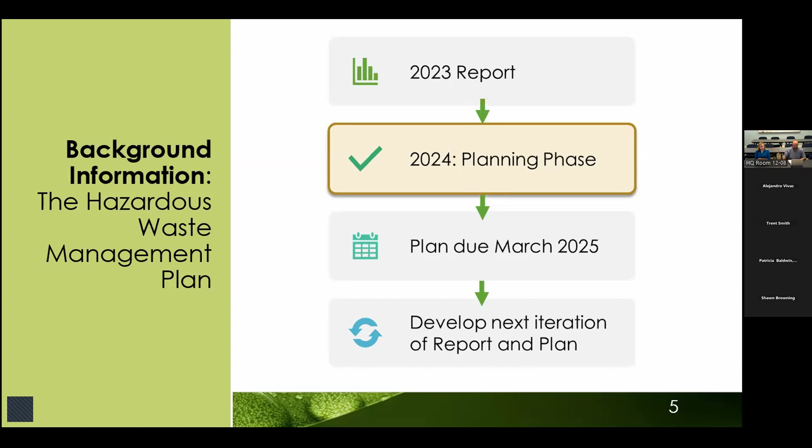This is an iterative process, and we're currently using the information in the report and the feedback that we've received over the last couple of years to develop a hazardous waste management plan. Now, the plan itself will include specific goals and recommendations that relate to the information that we're discussing throughout these 10 workshops. Next slide, please.

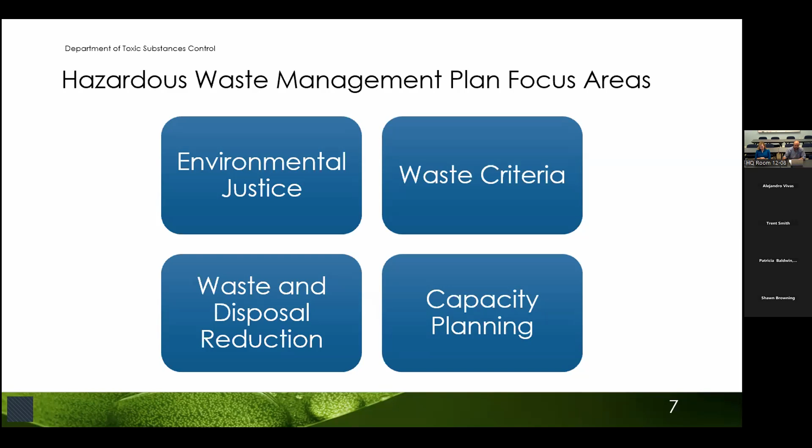Hazardous waste management planning offers an opportunity to recenter and redevelop a focus on hazardous waste generation and reduction. This begins by quantifying and understanding the industries and numerous processes that generate hazardous waste. This will also allow us to better identify opportunities for waste reduction, so alternative hazardous waste treatment technologies can be best applied. In addition, it will allow us to determine if there are regulatory barriers to waste reduction.

In 1984, Congress created the Land Disposal Restriction Program, which prohibits the land disposal of untreated hazardous waste and requires EPA to specify either concentration levels or methods of treatment for hazardous constituents. The LDR program ensures that wastes are properly treated prior to disposal. This makes hazardous waste less harmful to groundwater by reducing the potential for leaching of hazardous constituents and by reducing waste toxicity through destroying or removing harmful constituents.

One of the three main keys to the LDR program is called the disposal prohibition. This prohibition really is the basic premise of the LDR requirements, and it requires waste-specific treatment standards to be met before a waste can be disposed to land.

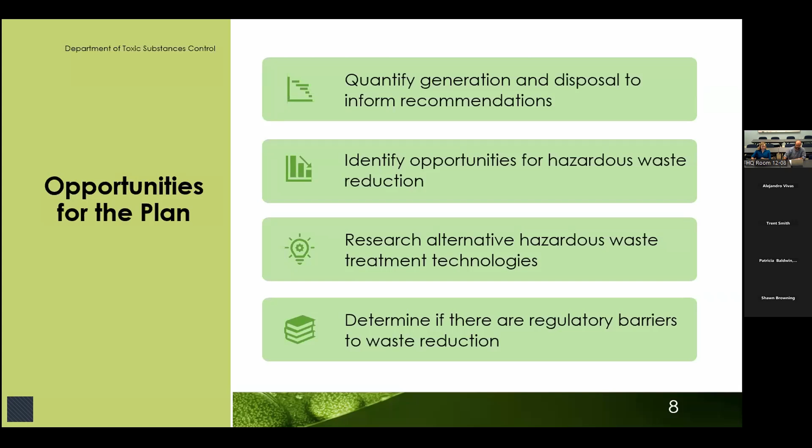Hi, my name is Kayla Kuhl. I'm a hazardous substances engineer with the Hazardous Waste Management Plan unit. As Ryan said, I'll be presenting today on a specific waste stream, which is hazardous waste that requires incineration as its treatment method. I'll be providing a broad overview of incinerable waste from cradle to grave.

Incinerable waste is a waste stream that gets a lot of attention, and we think that it's worth further analysis. The Hazardous Waste Management team has recommended that this be a waste stream that is studied for reduction. In this workshop, we are going to be discussing the generation of incinerable waste and how incinerators work. We will also be exploring incinerable waste source reduction and potential alternative management for waste requiring incineration. As always, we want to hear from you, so we will be ending this workshop with a public feedback session.

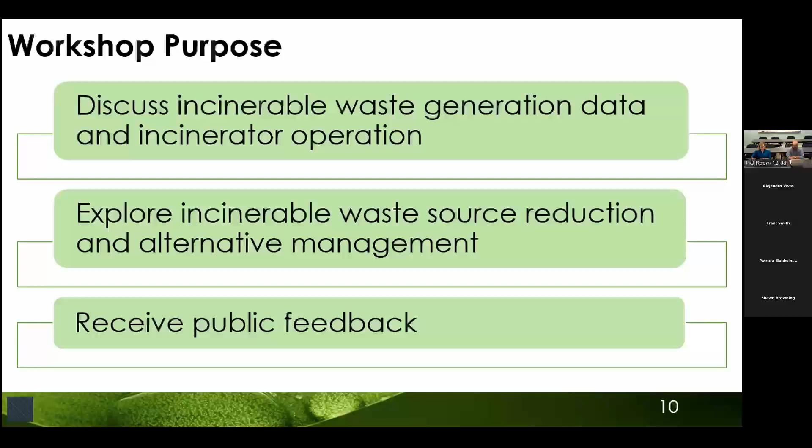We'll move into a discussion of what incinerators are, how they work, and the regulations they operate under. Then, I'll be discussing the potential for alternative technologies to use instead of incineration, and both the limits of these technologies and the potential regulatory concerns. Finally, I'll be discussing ideas for reduction efforts of incinerable waste.

So let's start off with the requirements for the Hazardous Waste Management Plan and why we are analyzing waste requiring incineration specifically.

SB 158 is the statute that determines the contents of the Hazardous Waste Management Plan, and it requires that the plan make recommendations on how to reduce the amount of hazardous waste generated or disposed of. This includes goals on particular waste streams or hazardous waste types.

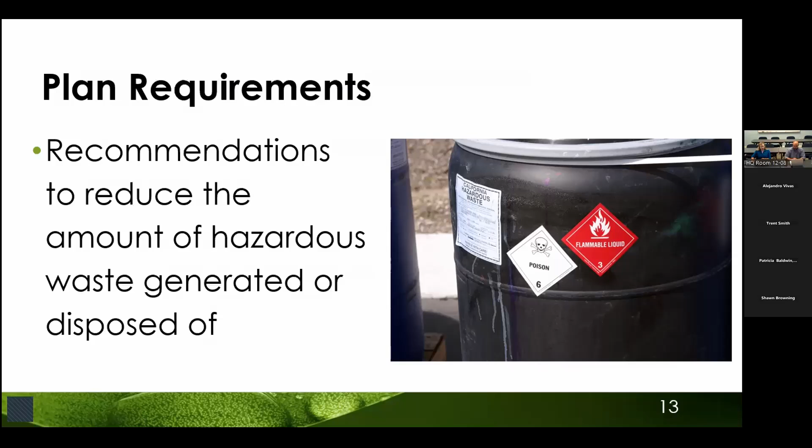For this iteration of the plan, we have recommended that hazardous waste requiring incineration as its treatment method be targeted for reduction. Waste requiring incineration is generated by a variety of industries, and even some household hazardous waste is managed by incineration. I will be going into generation data more in a bit, but first let's look more into why we have prioritized incinerable waste for reduction.

Incinerable waste only makes up about 3% by weight of hazardous waste manifested in California. So it's not that large of a waste stream compared to others, but incinerable waste may be a good target for reduction for several reasons.

Even though 81% of California's hazardous waste overall is non-RCRA and therefore only hazardous in California, those numbers are basically flipped for incinerable waste, where 78% of incinerable waste is RCRA and therefore hazardous federally. So even if that waste goes to other states, it must still be treated in a hazardous waste incinerator.

As Ryan mentioned, there are no commercial hazardous waste incinerators in California, and it is unlikely that any will be proposed. There are limited incinerators nationwide. The 2020 global pandemic also triggered a series of events that disrupted the hazardous waste management system nationally. In 2021, the US EPA sent a memo that they became aware of a backlog at the hazardous waste incinerators, and some facilities would no longer accept hazardous waste designated for incineration. This backlog created a national issue with managing these hazardous waste streams.

Our team has been communicating with the US EPA to monitor the situation, and even though there are signs that this backlog is improving, it has yet to fully resolve. So reduction in incinerable waste is more important than other types of waste from the perspective that there is very limited management capacity. Another reason we're looking at incinerable waste specifically is because these wastes may have potential for negative community impacts.

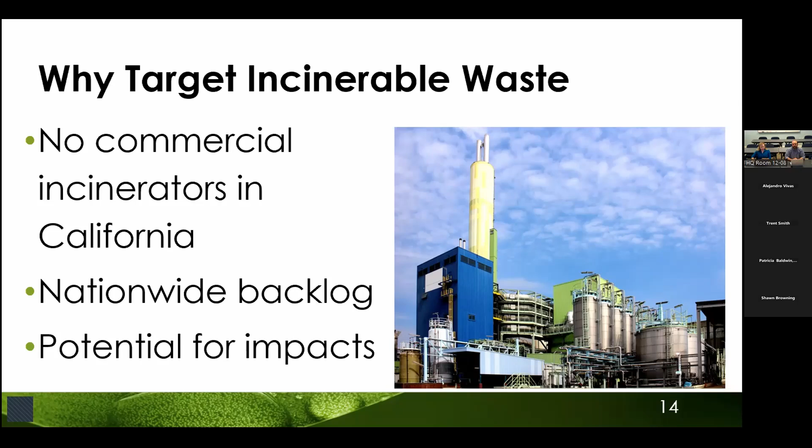Now, I want to note here that there's two different terms. There's the term combustor and there's incinerator. And those sometimes are used interchangeably, but they have different technical definitions. Incinerators are used to burn hazardous waste primarily for waste destruction and treatment purposes, though some energy or material recovery can still occur. The term combustor is broader and includes not only incinerators, but also facilities where waste is destroyed, but substantial energy recovery occurs as well. The facilities that are primarily for energy recovery are called boilers and industrial furnaces, or BIFs.

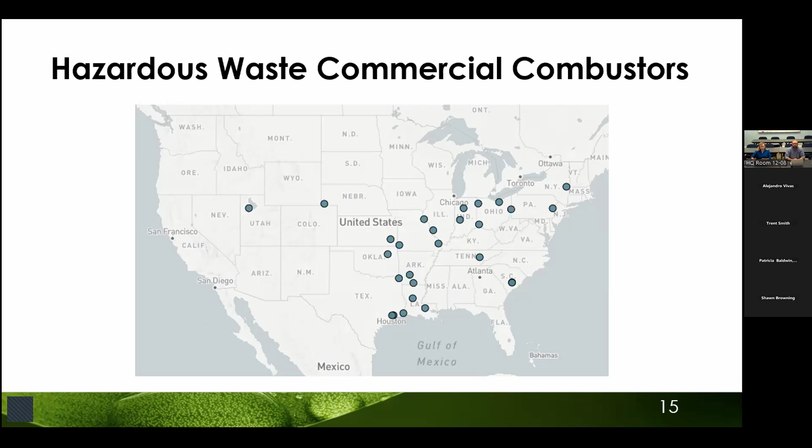As you can see, there are very few facilities in the entire western half of the United States and none in California. There's more in the eastern half of the country, but they're still pretty limited, which is why there's a capacity shortfall for incinerating hazardous waste.

Imbalances in the hazardous waste management system can have impacts to Californians and their communities. First, it can lead to illegal disposal. This photo shows 2,600 gallons of illegally abandoned hand sanitizer dumped in the Lucerne Valley in September of 2023. During the pandemic, there was a large ramp up of production of hand sanitizer to help protect people from the coronavirus.

But as their expiration dates passed, that hand sanitizer became an ignitable hazardous waste. As we discussed on our last slide, there is limited incineration capacity, and this lack of capacity in part could have contributed to this type of illegal mismanagement. I don't want to imply that an excess supply of capacity will stop all illegal mismanagement issues. Hazardous waste is expensive to dispose of, so some people will always break the law even if there is excess capacity.

That being said, the lack of capacity can contribute to these types of issues. Also, if other states had no hazardous waste incinerators like California does, then there wouldn't be any legal way to dispose of hazardous waste requiring incineration. And while there will always be potential impacts from the generation and proper management of hazardous waste, the impacts of illegal disposal will be worse.

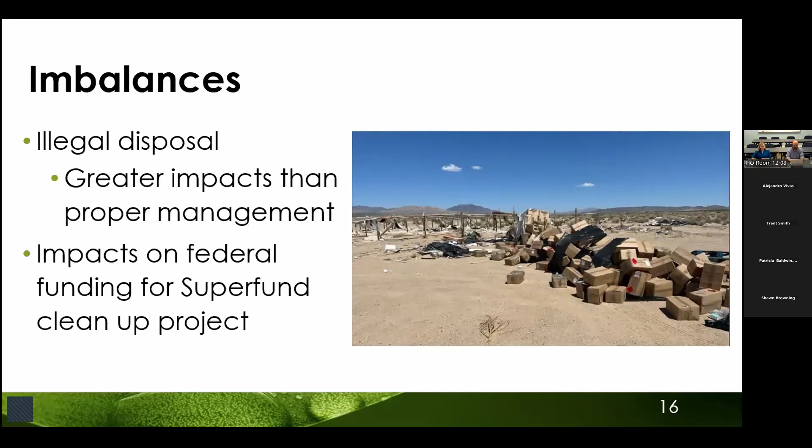In summary, waste requiring incineration as a treatment method has been targeted for reduction because there are no incinerators in California and very few nationwide. So there is a national capacity shortfall. If California does not address our capacity shortfall, then there is a potential for new CERCLA funding to be endangered. We also need to do further research into the potential impacts that waste requiring incineration has. We do know that if there isn't adequate capacity for legal hazardous waste management, then there will be negative impacts from the illegal disposal of that waste.

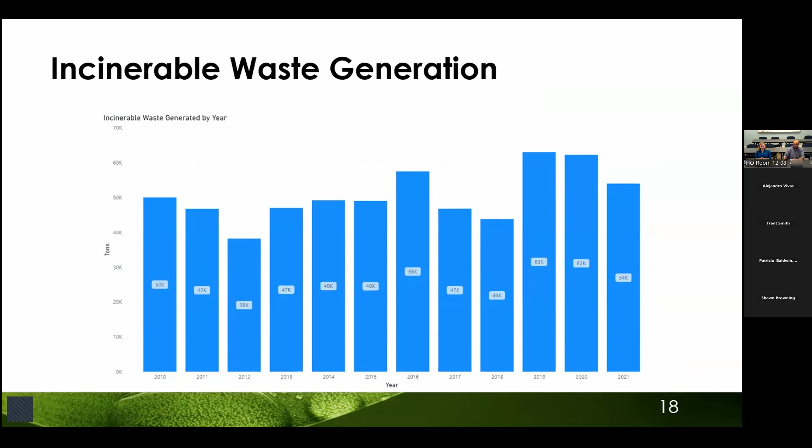Let's start off with an overall generation trend. This graph shows the incinerable waste generated between 2010 and 2021. As you can see, there doesn't seem to be any clearly increasing or decreasing generation. The generation looks a little higher than 10 years ago, but not enough to clearly see an increasing trend. And there's a decent amount of fluctuation from year to year.

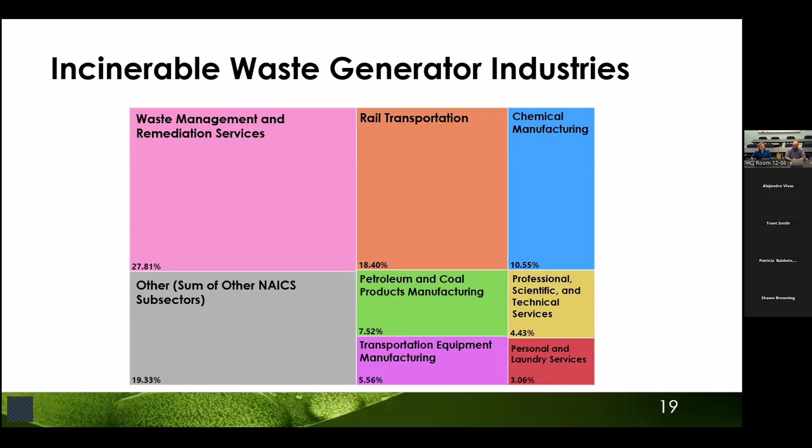To further understand incinerable waste generation, we looked at the top 5 RCRA wastes requiring incineration in 2021. As a reminder, RCRA is waste identified as hazardous federally, not hazardous waste only in California. It's probably not surprising that the top code is D001 for ignitable hazardous waste, since burning the waste in an incinerator will remove the characteristic that made it hazardous. This is a broad category of many wastes.

Looking at the NAICS codes generating D001 waste, it seems to match the overall trend for incinerable waste, with the top categories being waste management, transportation, and chemical manufacturing. One interesting thing is that the 4th largest industry generating D001 waste is hospitals and related services, which does not show up as one of the top NAICS codes overall. This may be like sanitizer being incinerated, but this may require future research.

The other top waste streams are D007 for chromium waste, F003 for non-halogenated solvent waste - non-halogenated solvents include things like methanol, acetone, also blends of solvents that are non-halogenated. The 4th category is D035 for methyl ethyl ketone waste, and the 5th is D005 for barium waste.

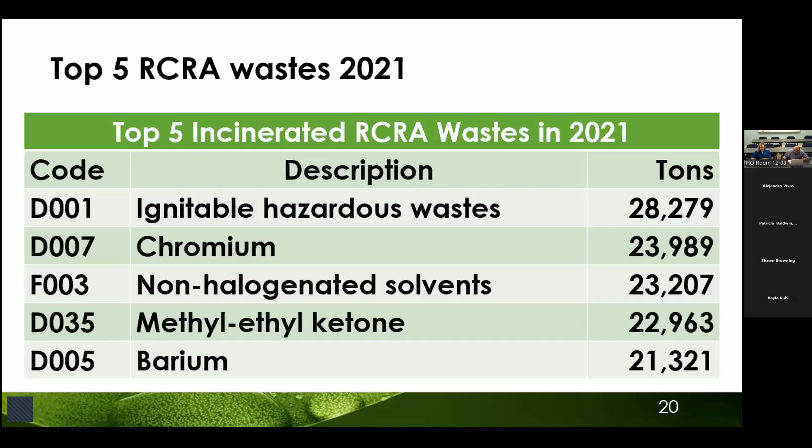We know in general what industries are generating these wastes, but more research is needed to determine which industries are generating specific categories within these waste codes. D001 especially requires more research because it's the top waste stream, but also because there is a wide variety of wastes that fall into that code.

Most hazardous waste being incinerated is required by RCRA, but we also polled the top 5 non-RCRA incinerable waste for 2021 to better understand why some wastes are only hazardous in California, but still managed by incineration as treatment. The top waste stream is 612 for household waste. This is extremely ambiguous from the name, but it can include things like aerosols, gasoline, and paint. The second highest waste stream is 343 for unspecified organic liquid mixture, which is also pretty vague, but can include paint as well. The third highest is 331 for off-spec, aged, or surplus organics.

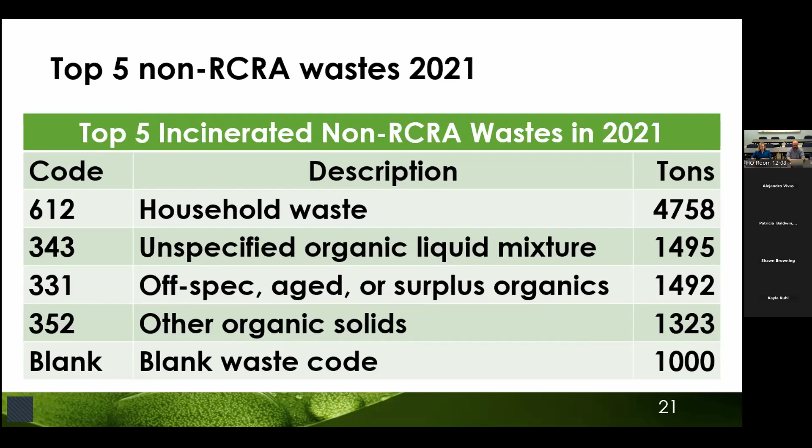That tells you why it's a hazardous waste, but it doesn't tell you what the chemicals are under that umbrella of being off-spec or past expiration date. The 4th largest waste stream is 352 for other organic solids, which is also extremely vague and non-descriptive, but can include spent refinery carbon, painted materials, and solvent-contaminated debris like spill cleanup wipes. The 5th largest non-RCRA waste stream had a blank for the waste code, representing errors in our manifest system.

Let's look at where incinerable wastes are going. As you can see, the pattern of out-of-state destinations mostly follows where the incinerators are located. In general, the larger the dot, the more tonnage of incinerable waste received, though it's not perfectly proportional. There are some smaller dots in areas that do not have hazardous waste incinerators, including in-state. These may include transfer facilities where waste is being combined, but we need to research that further.

The numbers on this graph are the tons of incinerable waste sent to each facility. They are rounded to the nearest ton. So dots that have a 0 next to them received a little bit of incinerable waste, but it was less than half a ton, so it rounded down to 0 when rounded to the nearest ton.

Not particularly surprising, the closest hazardous waste incinerator to us in Utah received the most incinerable waste in 2021 at 24,000 tons. The next closest facility to us in Colorado received the second highest amount at 12,000 tons. Several other incinerators in the eastern half of the country also received large amounts of California-generated incinerable waste.

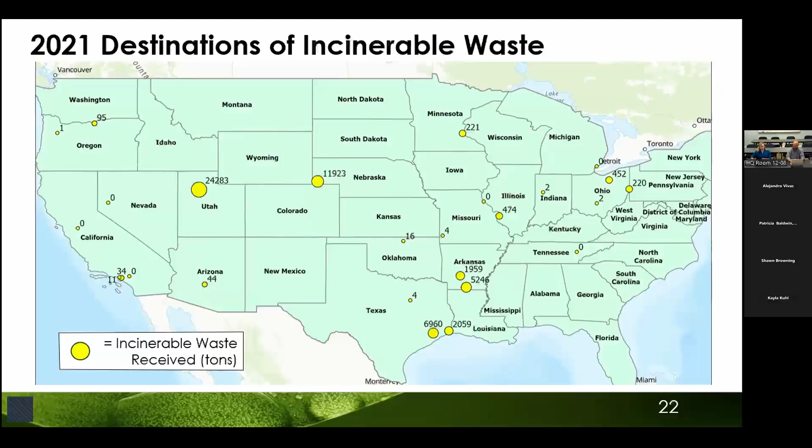We calculated the distance from generators to destination facilities. The 2023 Hazardous Waste Management Report included a calculation of the average distance between generators of manifested hazardous waste and the destination facilities receiving that waste. The distance was calculated using information from Hazardous Waste Manifests between 2010 and 2022 between each generator and destination facility, which accounts for the curvature of the earth, but not any actual physical roads taken. So this is an average direct distance, but could be called an as-the-crow-flies distance. The average direct distance between generators and destination facilities for all Californian manifested hazardous waste was calculated to be about 500 miles.

As mentioned, this is not the actual routes taken, just the physical distance between the two points and the curvature of the earth. The actual distance traveled will always be larger than the calculated ideal distance, though exactly how much larger may vary.

The calculation was repeated for waste requiring incineration specifically, and the average distance between generators and destination facilities was found to be 1,000 miles, twice the overall average distance hazardous waste traveled. This isn't surprising because for other waste types, California can handle a lot of its hazardous waste in state, which brings the average down.

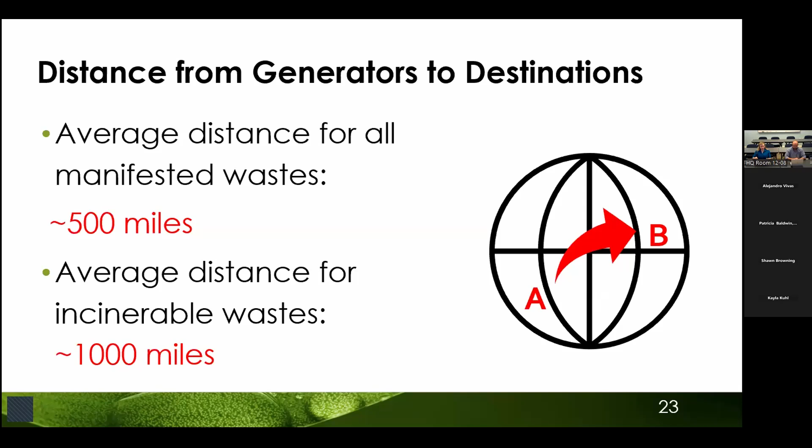I want to note that a lot of these longer distances for hazardous waste transportation take place on trains, or at least partially on train. You may have a truck bring waste from a generator to the nearest train. However, it's still worth noting the longer distance traveled, even on a train, still means more greenhouse gases being emitted for transportation of that hazardous waste.

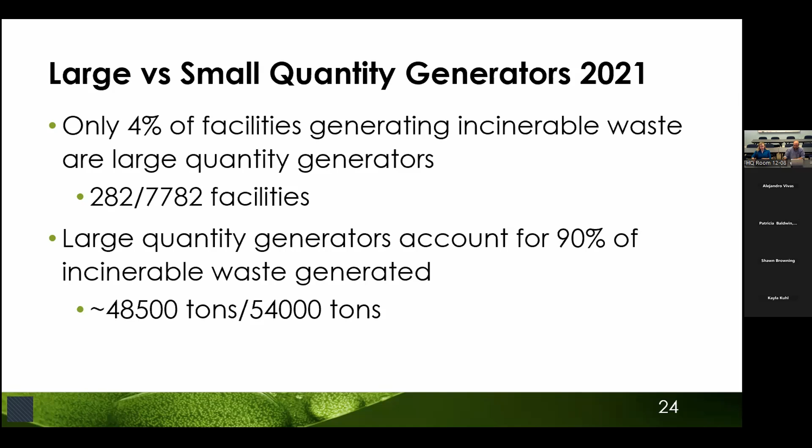However, DTSC does not have authority over local zoning decisions with regards to the locations of businesses. Next slide, please.

Let's look at the locations of these large quantity generators. In SB 535 designation, Cal EPA formally designated 4 categories of geographic areas as disadvantaged.

First, census tracts receiving the highest 25% of overall scores in Cal EnviroScreen. Second, census tracts lacking overall scores in Cal EnviroScreen due to data gaps, but receiving the highest 5% of Cal EnviroScreen cumulative pollution burden scores. Third, census tracts identified in the 2017 designation as disadvantaged regardless of their scores in Cal EnviroScreen. And fourth, lands under the control of federally recognized tribes.

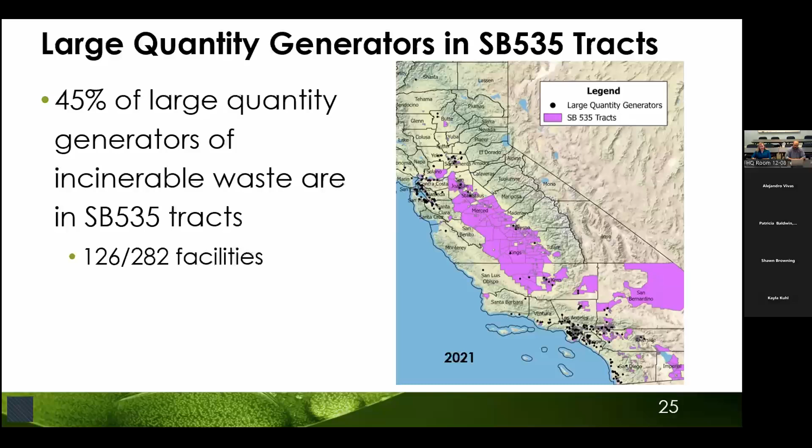We do see these facilities in our system, but we don't see them sending their waste to an incinerator because we see them as sending it to the transfer facility, not the final incinerator. There may also be transfer facilities shown on this map that do not generate the hazardous waste themselves, but are considered large quantity generators in this analysis because of the amount of hazardous waste they accept. Next slide, please.

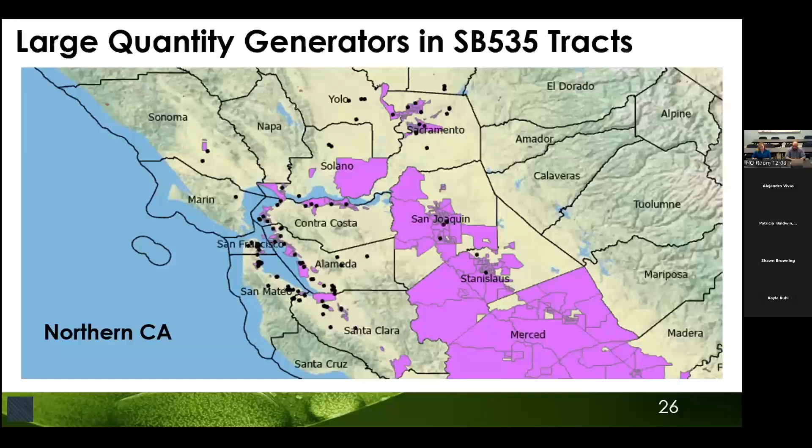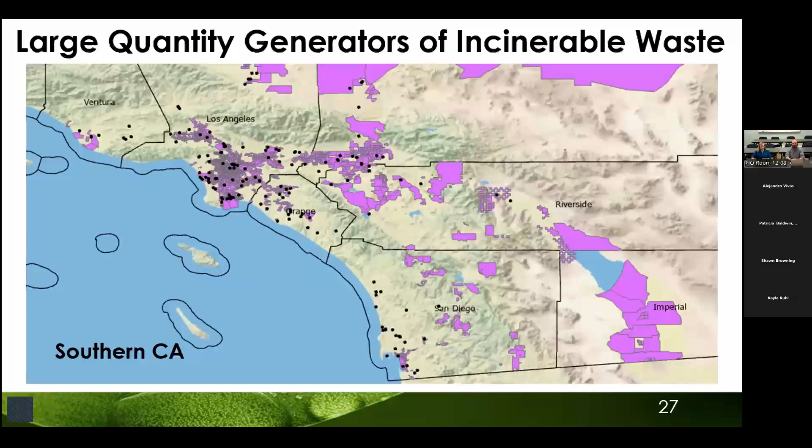Here's a zoom in of that same map in Southern California. Now you can see on this map very clearly there's a pretty substantial cluster of large quantity generators located in SB 535 communities near Los Angeles. Next slide, please.

We've discussed the cradle of incinerable waste in terms of generation. Now let's look at the grave for this waste, which is the incinerators themselves.

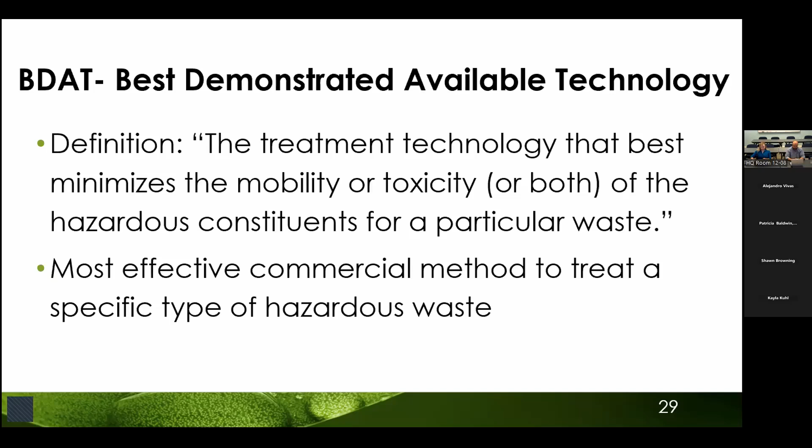The BDAT has to either decrease the mobility or the toxicity of a hazardous waste, ideally both. Incineration reduces toxicity by destroying toxic organic constituents. Mobility is also decreased. You can incinerate a liquid waste such as a solvent and produce a solid ash. Liquids can't be disposed of in landfills because they're mobile and difficult to contain even with liners, but ash is less mobile, so it's easier to contain. Incineration also substantially reduces the volumes of these wastes.

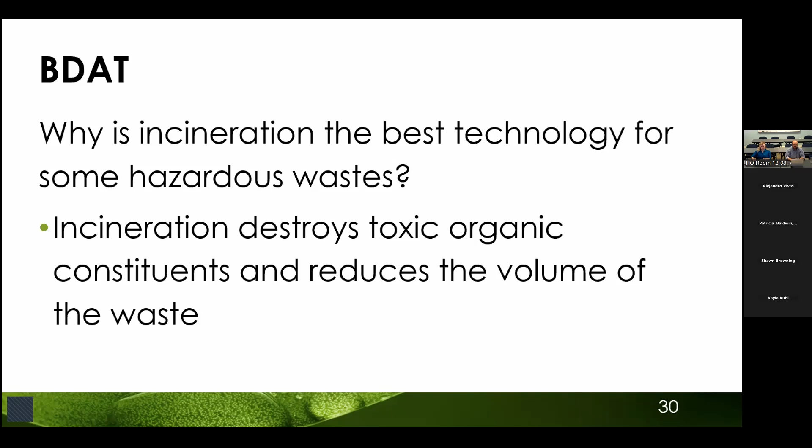The materials are then placed in the combustion chamber of an incinerator where they are heated to an extremely high temperature for a specified period of time. The temperature and length of time required depend on the types of waste and contaminants present. Air or pure oxygen may be added to the chamber to supply the oxygen needed for burning. As the waste heats up, the contaminants change into gases and most are destroyed. Gases that are not destroyed pass through a secondary combustion chamber for further heating and destruction. Ash is produced as a byproduct.

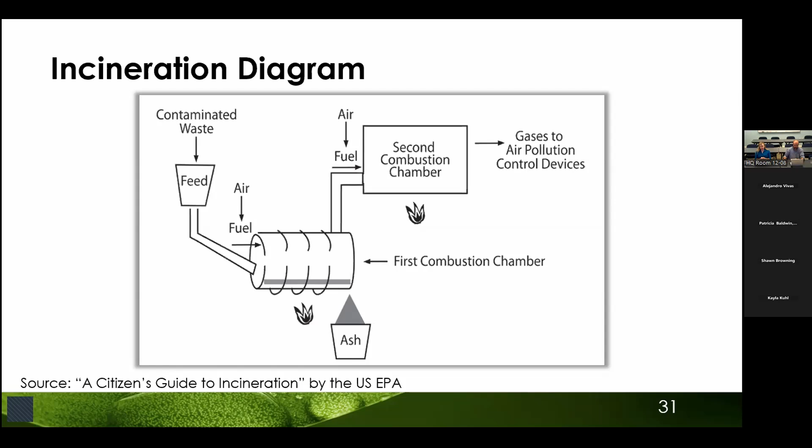The resulting gases that are not captured then pass through the air pollution control equipment, which removes particulate matter. The particulates might be very small solid particles like airborne ash, or they could be liquid droplets. It also removes acid gases, which include things like nitrous oxide.

Incinerators are extremely hot, operating between 1600 and 2500 degrees Fahrenheit. It's really difficult to even comprehend how hot that is, except to say that a standard fireplace burns between 500 and 1100 degrees Fahrenheit, so a good deal less.

The length of time needed inside the incinerator varies significantly. Solid wastes take longer to burn and may have residence times of 30 to 90 minutes, while liquid wastes are incinerated in mere seconds. There are regulatory controls for emissions which are met by using air pollution control devices, which I'll discuss more on the next slide.

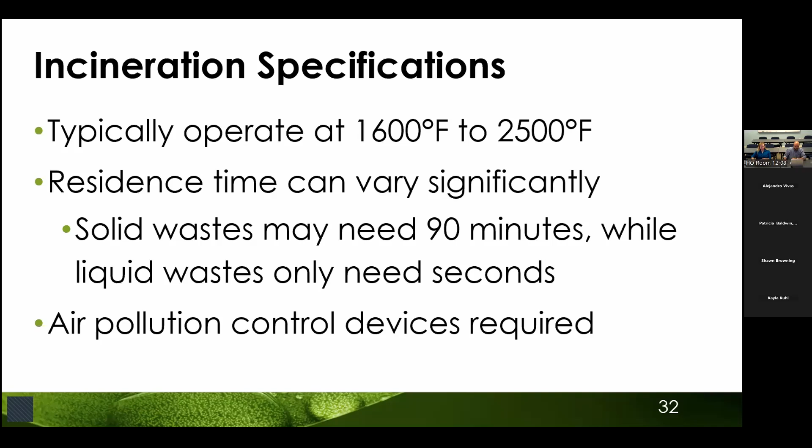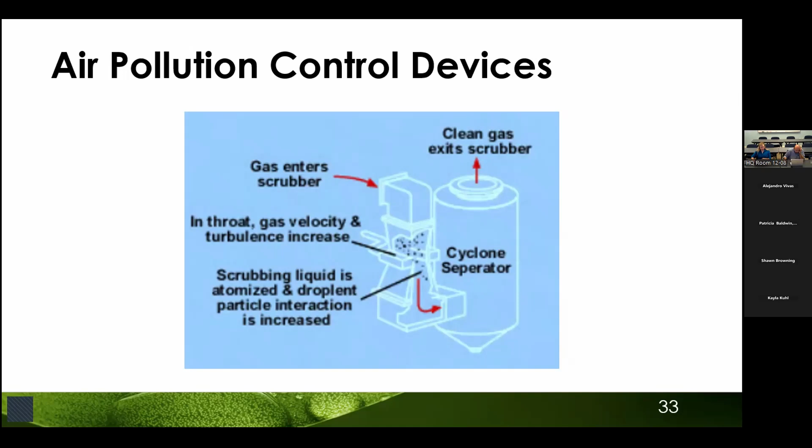Incinerators have very tight control standards. The general destruction of organic constituents must be 99.99%. Dioxin destruction has stricter standards and must be 99.9999%. Particulate emissions must be less than 180 milligrams per meter cubed. These standards have been designed to be protective of human health and the environment. These are RCRA requirements. There may be additional air pollution requirements in California, depending on the air pollution control districts, but we have not researched those additional requirements.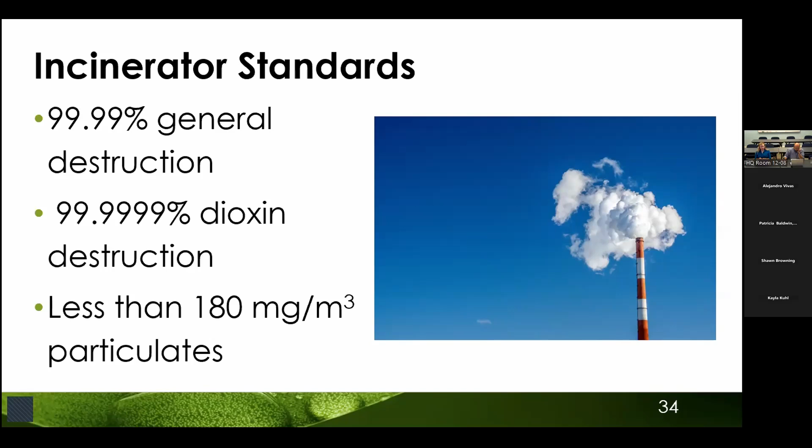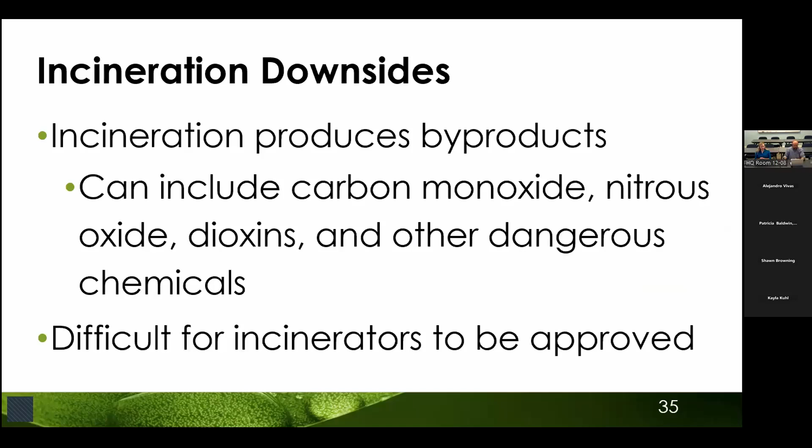There are many concerns about incinerators. Incineration facilities serve as destinations for large volumes of hazardous waste. The incineration process can produce extremely harmful products such as carbon monoxide, nitrous oxides, dioxins, and other dangerous chemicals. Though incinerators have air pollution control devices and are governed by emissions regulations, there are still concerns about even low levels of emissions of these chemicals. Because of these concerns, it's extremely difficult for the construction of a hazardous waste incinerator to be approved. This has resulted in a shortage of hazardous waste incinerators compared to the generation of waste requiring incineration, as I discussed previously.

Incinerable waste may benefit from alternative treatment methods. For example, supercritical water oxidation, also known as SCWO, has been proven effective at treating some incinerable waste. We know from feedback we've received that there's a lot of interest in this technology, and we even visited a facility that demonstrated SCWO for us. The demonstration was for PFAS-containing waste, which is not a hazardous waste. But the technology could also be used for hazardous waste destruction and has been proposed as an alternative treatment for waste which otherwise would require incineration. However, the technical and regulatory limitations of SCWO and other alternative technologies may be a primary driver of why these technologies are not widely used.

As new alternative technologies are researched, we will also continue to research potential regulatory restrictions on these technologies.

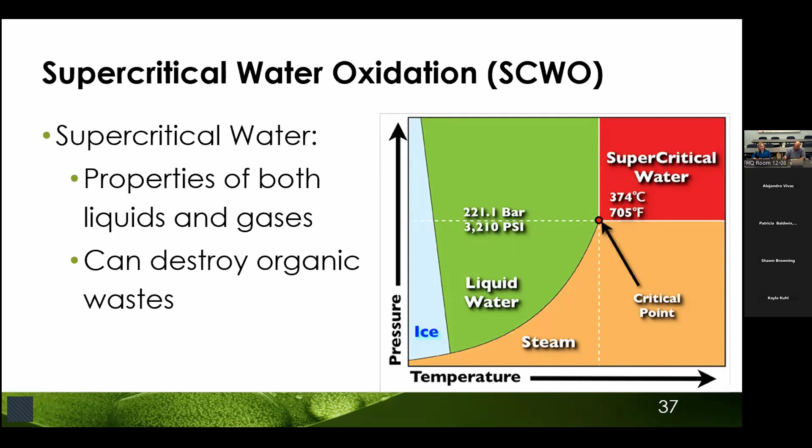SCWO stands for supercritical water oxidation, and water can be made supercritical at extremely high temperatures and pressures, above 705 degrees Fahrenheit and 3,210 PSI. Supercritical water exists as a single dense phase that moves through media like a gas, but has solvent properties more like a liquid. Also, water undergoes a change in its solvent behavior once it becomes supercritical. This allows supercritical water to be able to destroy organic wastes when normally organic wastes are not soluble in water.

Supercritical water oxidation has been used on a small scale for about 40 years as a treatment technology for aqueous-based organic waste. The SWO process allows for the rapid destruction of a wide variety of organic species that are normally considered difficult to break down. Corrosion and salt precipitation are the two biggest challenges in SCWO processing. There have been many companies that have used SCWO technologies that are no longer in business, and poor management of corrosion and salt plugging is likely the technical reason that some SCWO companies have shut down.

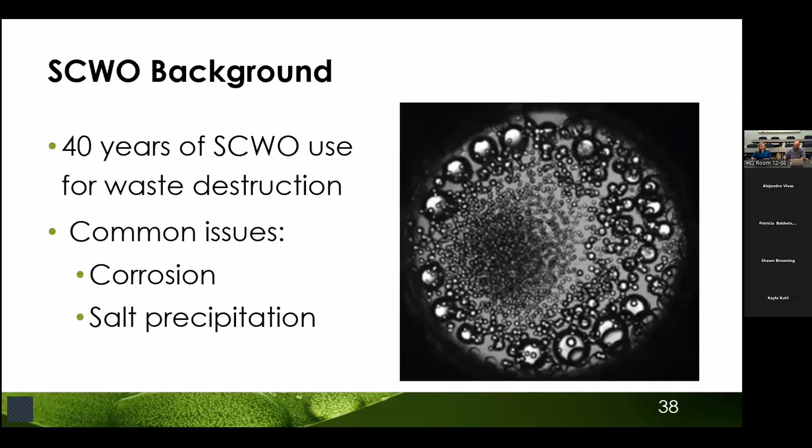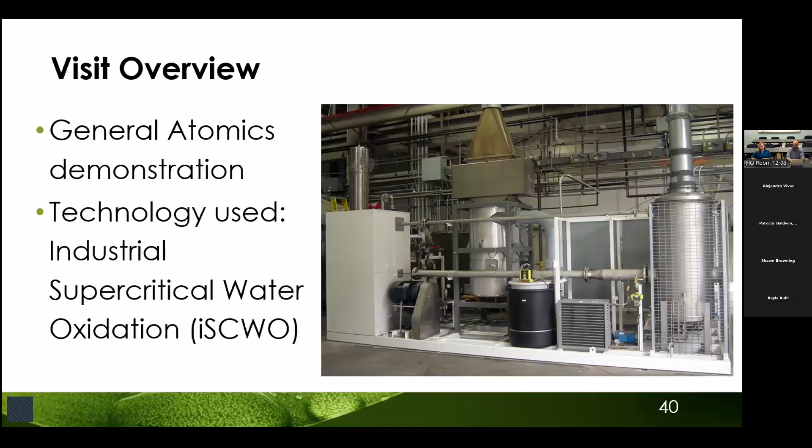Under these conditions, organic materials, oxidation reactants, and oxidation products are rendered miscible in water, meaning they form a homogeneous or uniform mixture. This allows complete oxidation to take place at a really high rate. Only 3 to 4 seconds of residence time is needed for destruction, though the setup they demonstrated had a 10 to 12 second residence time to allow for a margin of error.

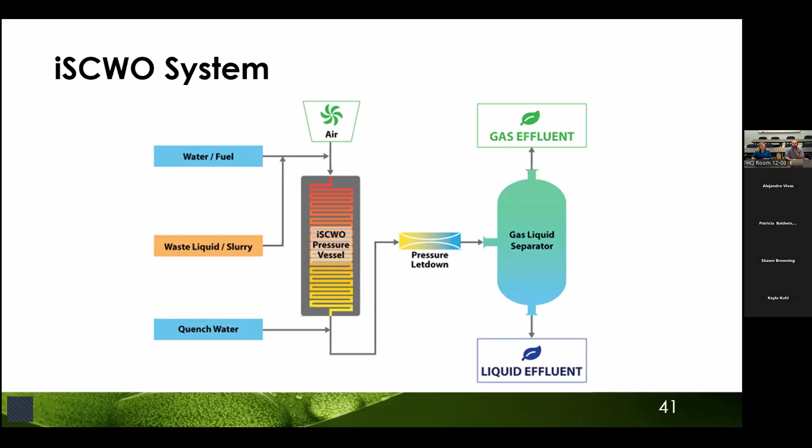That picture is actually one of the iSCWO mobile units. The purpose of this visit was for General Atomics to advertise how their technology can be used. SCWO can be used on a wide variety of feed materials, including spent activated carbon, fluorinated organics, fuel oil, mining waste, and resin beads. The specific demonstration they provided was on the destruction of PFAS.

When incinerated, PFAS and other fluorinated compounds release hydrogen fluoride, which is extremely hazardous. But SCWO of fluorinated waste did not detect hydrogen fluoride in the effluent stream after neutralization. That being said, it was present pre-neutralization.

I mentioned earlier that corrosion and salt plugging tend to be the two biggest issues in managing SCWO. General Atomics noted that some corrosion is seen on their equipment, but their reactors have a replaceable liner, which is relatively inexpensive compared to the total cost of the reactor. This liner material can be selected based on the feed being processed, so the most resistant material possible is used, and replacement of the liner takes place in only a few hours.

Also, because iSCWO uses a vessel reactor that's about 10 to 12 inches in diameter, instead of a narrow pipe reactor like other companies have used, the issues of salt plugging are minimized, because even if there's a little bit of salt buildup on the walls, it's not plugging the reactor.

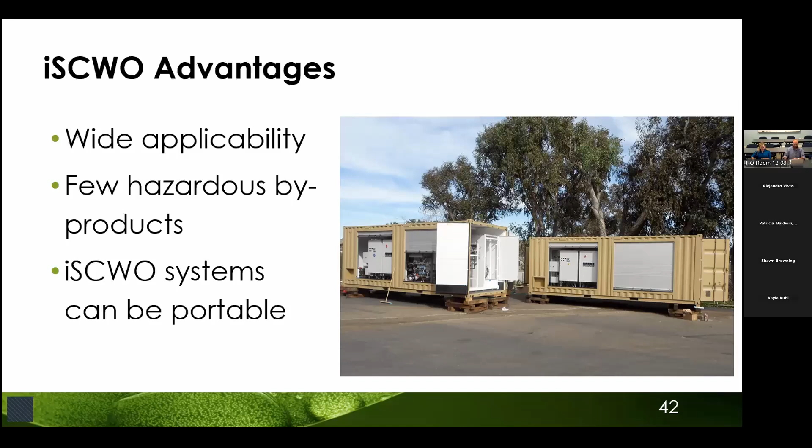As mentioned earlier, there are no commercial hazardous waste incinerators in California, and a national capacity shortage is resulting in a backlog of waste needing incineration. There are issues siting additional incinerators or even expanding existing ones, so the national capacity is unlikely to significantly increase.

However, supercritical water oxidation systems may have more public acceptance than incinerators, so there is more of a possibility of them being built in California, though of course they would still need to go through California's permitting process.

Based on conversations with General Atomics, the byproducts of iSCWO are typically non-toxic compared to an incinerator. This is a technical advantage of iSCWO over incineration, but it could also possibly make iSCWO easier to permit. However, it's really difficult to make generalized statements of the byproducts of SCWO versus incineration that are applicable to all waste streams that might be processed.

For a given waste stream, the byproducts of SCWO could be modeled in a computer, but you would need small-scale testing to determine the byproducts of SCWO with certainty.

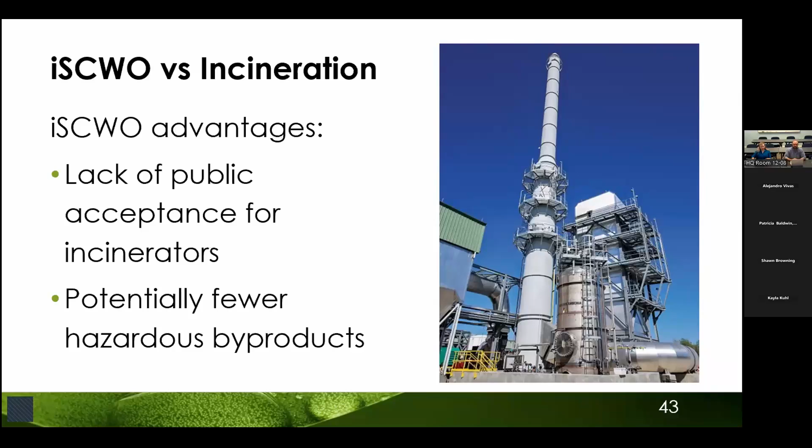iSCWO has some challenges to implementation. There is a high upfront equipment cost, including not only the iSCWO equipment itself, estimated to cost approximately $3 to $5 million, but also supporting items such as the building to house the unit, utilities, electricity, and wages. This doesn't account for any costs or the time investment associated with permitting a hazardous waste treatment unit in California.

However, I don't want to imply that incinerators aren't also expensive, although, as I'll describe more later, incineration does occur at a far larger scale than SCWO. We don't know how much an incinerator would cost because none have been built recently, but just to get a very ballpark estimate, there was a relatively recent incinerator expansion that increased capacity by 70,000 tons of hazardous waste yearly, and that expansion cost $120 million. So it's also very expensive.

We also don't know how much a boiler or industrial furnace would cost, but those cement kilns and other boilers and industrial furnaces do get to offset their costs a bit by getting energy value back from the burning of hazardous waste. With SCWO, there wouldn't be any offsets to the high cost by energy recovery.

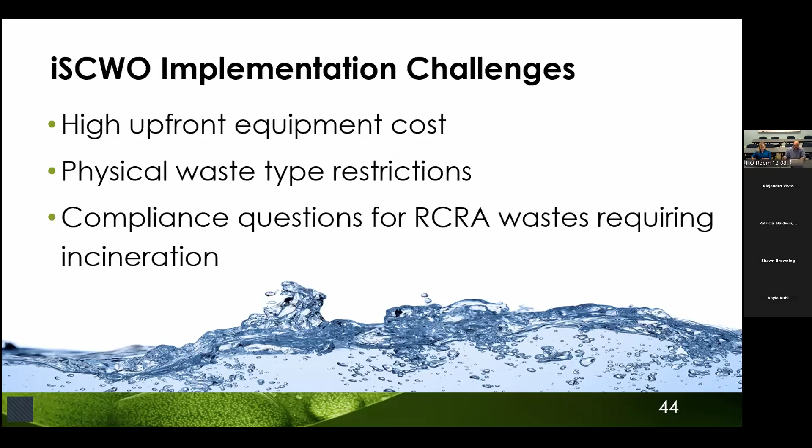One of the biggest disadvantages of iSCWO compared to incineration is throughput, and that's how much material you can put through the system in a given period of time. iSCWO operates at a feed flow rate of 3 gallons per minute. The system is theoretically capable of running up to 5 gallons per minute, but this is typically not the case. Also, some feed materials run at less than 3 gallons per minute, depending on the energy content of the feed. So the exact feed flow rate is going to be specific to the type of waste being processed.

I did a very rough back of the envelope calculation of iSCWO throughput. I assumed a typical 3 gallon per minute feed flow rate, but I also assumed 0 downtime in a year and 24/7 operation. I picked a very rough assumption for material density. Of course, that would also vary pretty significantly depending on waste type.

But using these numbers, I got that a single iSCWO unit could process about 5,000 tons of hazardous waste per year. In comparison, the hazardous waste incineration facility in Aragonite, Utah, typically processes more than 10 times as much hazardous waste per year at over 60,000 tons. It's permitted to process even more waste at 162,000 tons per year per the EPA.

Like I said, this is a very rough comparison, and it relies on a lot of assumptions for the iSCWO calculation. The most any iSCWO unit has been demonstrated to run is Monday through Thursday continuously, so 24 hours a day, but only 4 days a week instead of 7. This cuts the estimate down to only about 3,000 tons of material processed a year. This also does not include any downtime, either planned or unplanned. This is just to give you a very rough comparison of the throughput of a SCWO system versus an incinerator.

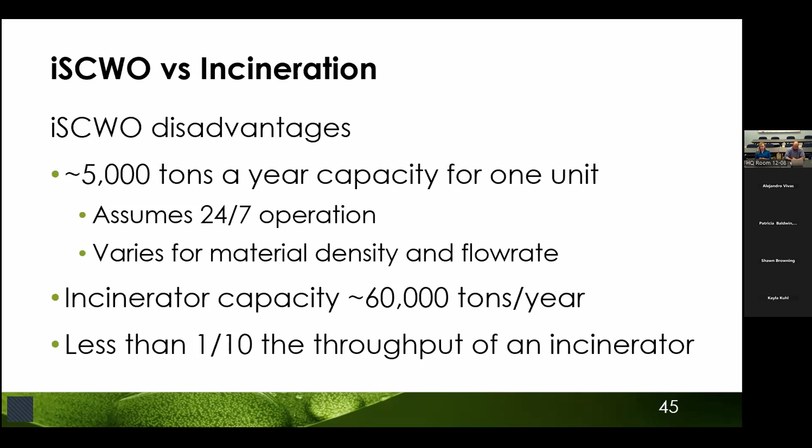Also, iSCWO would not be able to create non-hazardous compounds from metal-bearing waste such as chromium sludges, so those wastes would still require a different treatment.

In summary, General Atomics invited us to view a demonstration of their industrial supercritical water oxidation. The system uses the unique properties of supercritical water to destroy a wide variety of waste materials, including hazardous waste. The iSCWO system produces minimal byproducts.

At the time of our visit, General Atomics demonstrated the destruction of PFAS in firefighting foam, which is not a hazardous waste, but the technology has potential for other waste streams, including hazardous waste that otherwise might be managed by incineration.

General Atomics has proposed that iSCWO could be a potential alternative to incineration, given the issues siting incinerators. However, we are still researching the potential regulatory limitations to use of this technology. At a minimum, it would require a hazardous waste treatment permit under California regulations.

Also, while iSCWO is apparently technically capable of handling many of the same wastes currently treated with incinerators, a single iSCWO system running at ideal conditions can process less than 1/10 the hazardous waste that the nearest incinerator does. SCWO is currently not a large-scale or widely used technology.

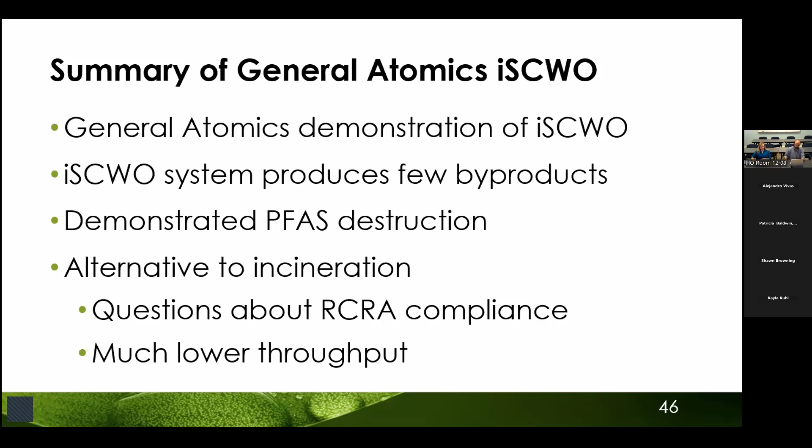Also, it would require a company wanting to build and operate a SCWO system for hazardous waste destruction. So there's a lot of additional unknowns that would need to be researched before fully understanding the potential of this technology.

We studied SCWO in detail because of the interest in the technology from the feedback that we received, but also because General Atomics invited us to see their demonstration facility. That's not the only potential alternative to incineration, though.

Pyrolysis is another thermal decomposition process, but unlike incineration, takes place in the absence of oxygen. Many of the concerning byproducts of incineration are less likely to form without the presence of air or oxygen. For example, a study on municipal waste showed that incineration formed 7 to 20 times more dioxins than pyrolysis did. So basically a whole order of magnitude more dioxins formed in incineration than pyrolysis. Pyrolysis also has its own limitations, such as feed size requirements and the need for low moisture content of the feed.

Wet air oxidation is used on waste streams that are too dilute to incinerate, but too concentrated for biological treatment. Wet air oxidation uses oxygen or air at high temperatures and pressures to break down complex molecular structures into simple components. The temperatures and pressures involved are high, but still far lower than those used in supercritical water oxidation. However, like SCWO, there are high upfront capital costs to wet air oxidation, and there are still issues with salt plugging and corrosion of the equipment.

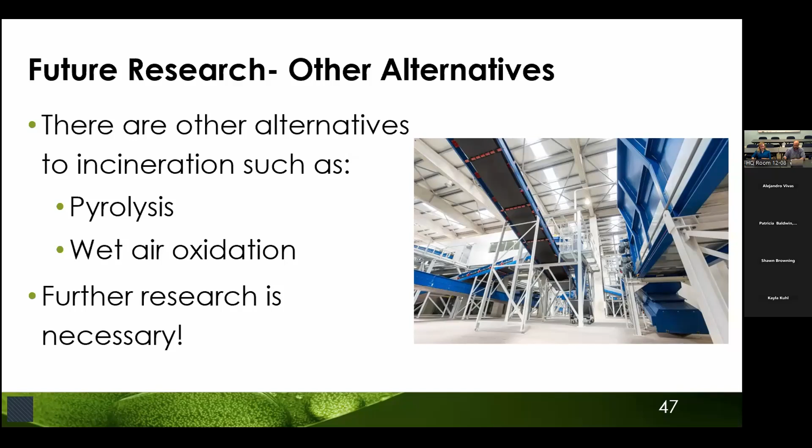All right, so let's look forward for a bit and talk about ideas for future waste reduction efforts.

If you attended our workshop on the pollution prevention program that used to exist at DTSC, you're probably familiar with the Incinerable Waste Minimization Project. You may have heard about it anyway, even if you didn't attend that workshop, because it was a major success for the program. There were still, back then, no commercial hazardous waste incinerators in California, so all waste requiring incineration had to be shipped out of state. Because of this, incinerable waste was noted as a focus area for reduction all the way back in the 1989 capacity report.

So this became a major project for the P2 program. The P2 program identified 57 facilities generating large amounts of incinerable waste that were identified as top priority. Of those 57 facilities, 39 signed a voluntary agreement to work with DTSC in exchange for technical and regulatory assistance. Five years later, in 1992, those 39 participating facilities had reduced incinerable waste generation by 53% compared to 1987. Numerically speaking, this was 92,000 tons of incinerable waste reduced to about 43,000 tons.

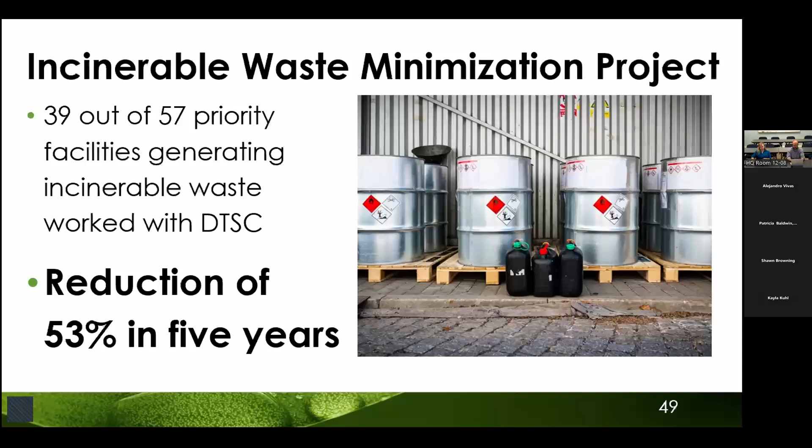So let's talk about some challenges to reduction. Hazardous waste is expensive to treat, so companies have a natural incentive to reduce generation. That means that hazardous waste being generated has some sort of obstacle for its reduction. Now, some of these obstacles may be easier to overcome than others. For example, many small businesses may not have staff dedicated towards efficiency, and they could have their hazardous waste generation reduced just by having an efficiency study conducted. For other companies, capital may be the issue—for example, updating their equipment to more efficient equipment, or equipment that doesn't produce waste requiring incineration.

However, there are still limits to efficiency and substitutions, because some chemical processes are inherently going to produce incinerable waste. There are other reasons that reduction may be difficult. Just as an example, prior to working for DTSC, I worked in pharmaceutical manufacturing. Pharmaceutical manufacturing is very tightly regulated by the FDA, and companies aren't allowed to make any changes to their processes outside of approved ranges, even if those changes would result in greater efficiency and lower waste generation. Making changes would require an expensive and lengthy process to refile the pharmaceutical drug with the FDA. Now, these FDA regulations that are limiting these changes are very important to protect human health, because changes to manufacturing processes could result in unintended and sometimes undetectable changes to the final pharmaceutical product. However, these regulations do make it extremely difficult to improve efficiency. Now, that's just one example of an industry that faces unique issues with waste reduction. Other industries may have their own unique barriers to waste reduction, and that's going to be something that we're researching further.

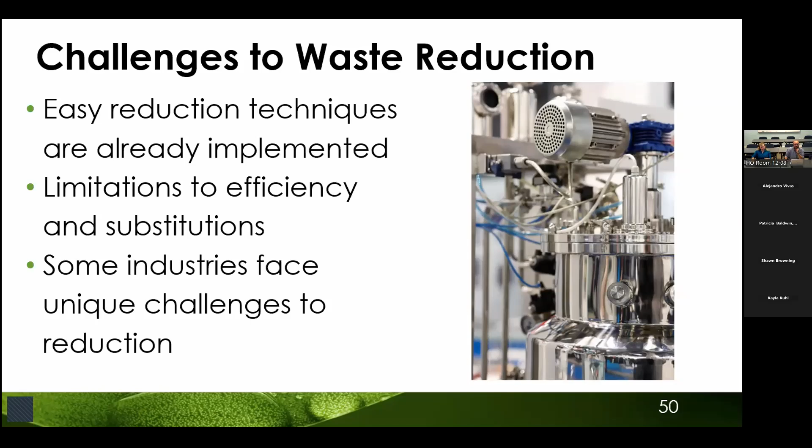The Hazardous Waste Management team has recommended incinerable waste as a target for reduction, but further research is needed to determine how that reduction could take place.

DTSC does not currently have a P2 pollution prevention program like it used to. This program was important because DTSC had internal expertise on hazardous waste generating industries and could use that expertise to work with generators on reduction. A reimagined P2 program could reestablish that expertise, which would be needed to help encourage voluntary reduction from generators. Without receiving additional resources to reform a P2 program, DTSC can still pursue pollution prevention, but of course it would be at a much smaller scale.